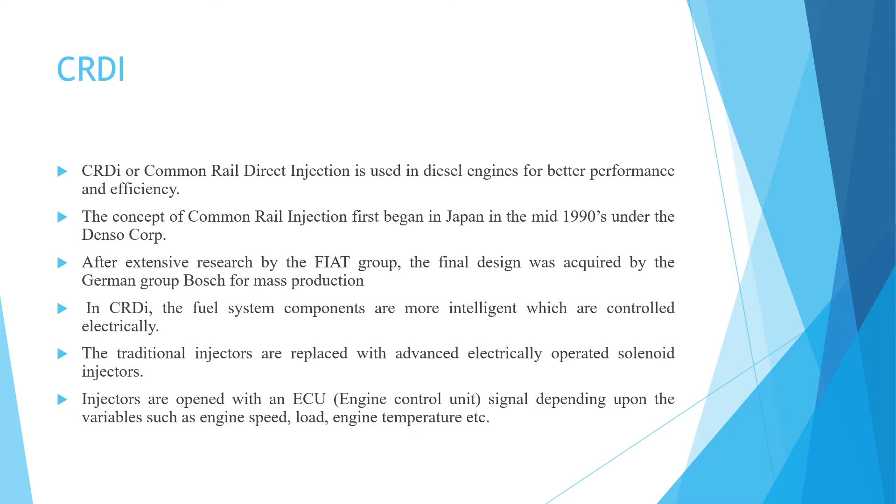In CRDI, there is a common line called the common rail, and each injector is directly connected with this line. Through this line, fuel is sent into the cylinder.

In conventional diesel engines, the pressure needs to be readjusted for each injection process. While in CRDI, the pressure is always constant, and this pressure remains constant along the fuel line.

The ECU adjusts the injection timing of the injectors depending on engine load and engine speed. The amount of fuel to be delivered to the combustion chamber is set by the ECU with information provided by sensors in the engine.

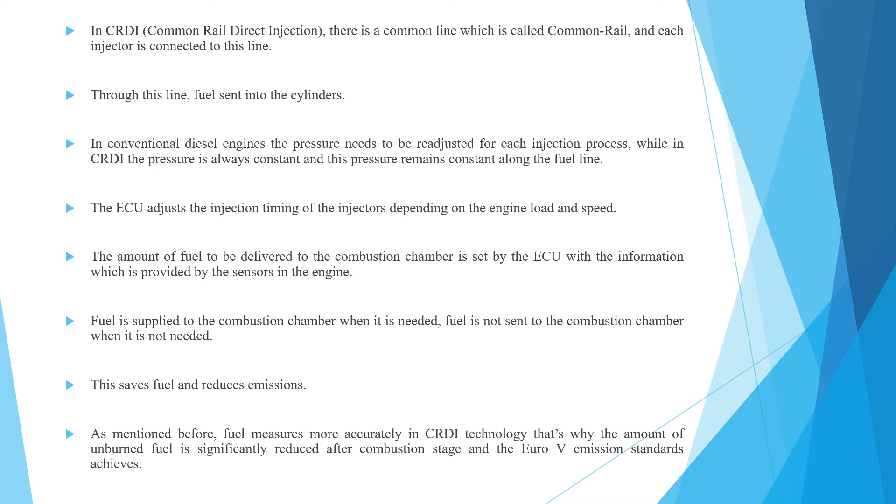History: The common rail system prototype was developed by Robert Huber and Dr. Marco Ganser at the Swiss Federal Institute of Technology in the late 1960s.

But the first successful use of this technology was accomplished by Japan in the 1990s. For the first time, this technology was used on heavy vehicles and later adapted to automobiles and passed to mass production.

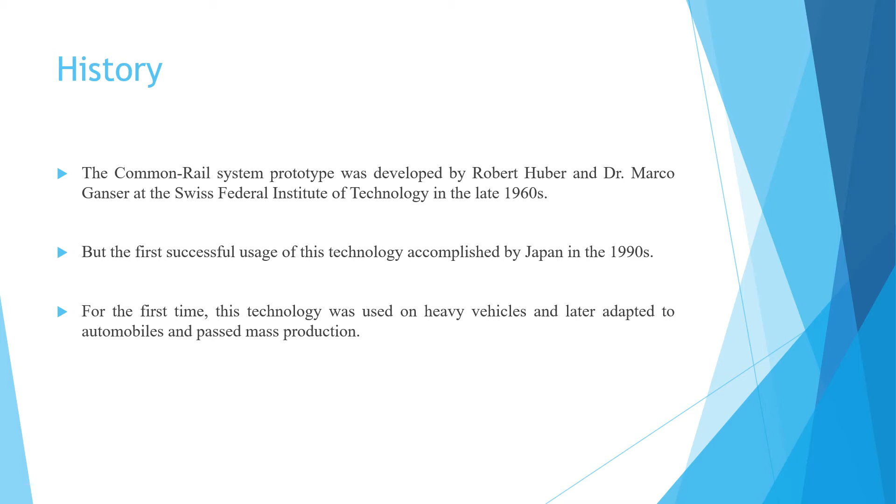The high pressure pump is used to supply fuel to the accumulator from the fuel tank. In case pressure in the accumulator increases beyond the limit, the high pressure relief valve, which is connected to the accumulator, helps to reduce the pressure.

Now this fuel from the accumulator is supplied to the engine cylinder using the fuel line with the help of solenoid injectors. Another spring-loaded high pressure relief valve is used to maintain constant pressure in the system for smooth operation. It also returns the extra fuel from the accumulator to the fuel tank.

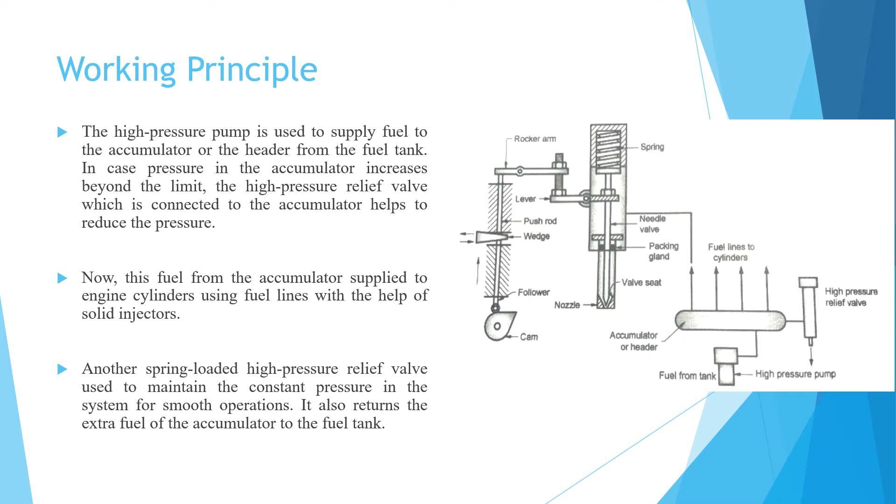In the diagram, you can see the needle valve. It is used to control opening and closing of the nozzle while it sprays fuel into the cylinder. The upward and downward motion of the nozzle is measured by the cam, which is connected to the spring with the help of the rocker arm and the lever.

During the dwell period of the cam, the spring, with the help of the needle valve, prevents the injection of fuel into the cylinder. The packing gland ensures the level of fuel above the valve seat for better injection of fuel into the cylinder.

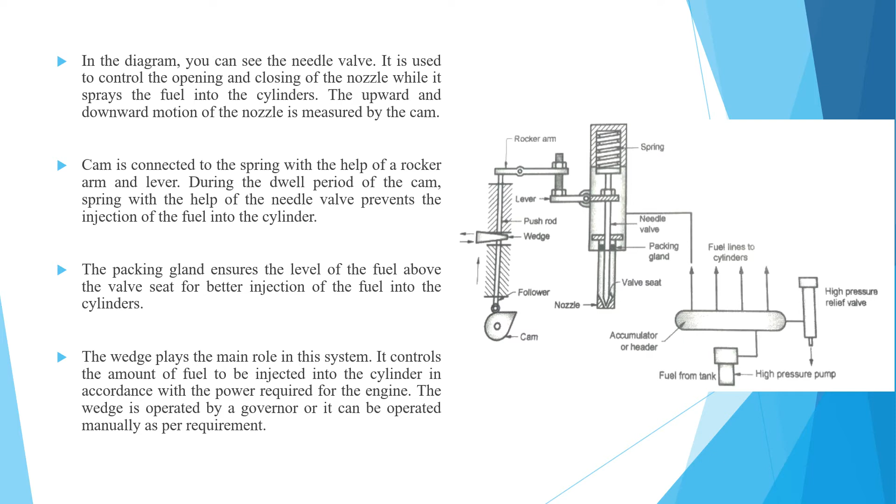The wedge plays the main role in this system. It controls the amount of fuel to be injected into the cylinder in accordance with the power required for the engine. The wedge is operated by the governor, or it can be operated manually as per the requirement.

Now coming to the features of CRDI technology. The emission problem has always been a problem.

For ships, trains, heavy duty vehicles, generators and other vehicles with diesel engines. Another important problem was that customers were constantly looking for economical engines with lower fuel consumption. The emission problem was solved by the diesel particle filter and the catalytic converter. But this time, these systems were causing a problem with the large space requirement. To cope with this problem, a few changes had to be made in the diesel engine.

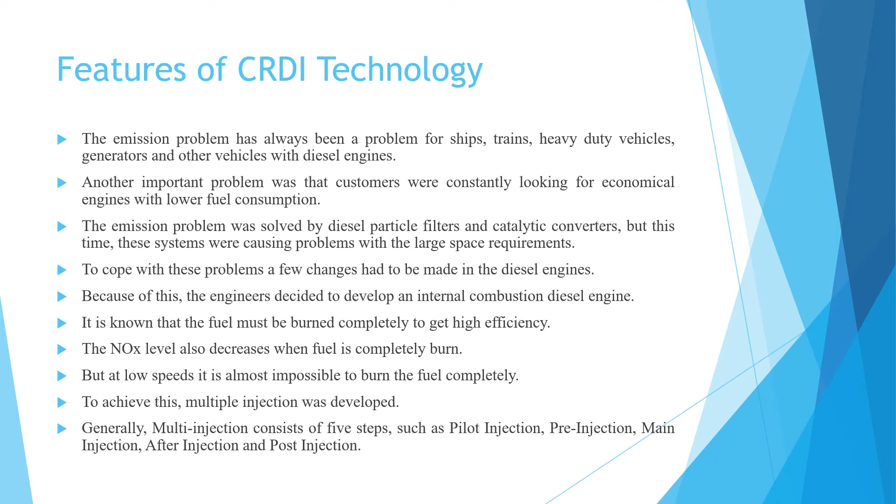Because of this, the engineers decided to develop an internal combustion diesel engine. It is known that the fuel must be burned completely to get high efficiency. The NOx level also decreases when the fuel is completely burned, but at low speed it is almost impossible to burn the fuel completely. To achieve this, multiple injection was developed. Generally, the multiple injection consists of 5 steps, such as pilot injection, pre-injection, main injection, after injection and post-injection.

In the first stage, the pilot injection occurs immediately before the ignition. It allows the fuel and air to mix properly. In the second stage, pre-injection occurs and it reduces the ignition delay before the main injection. NOx level, noise and vibration are reduced at this stage.

The heat generated by the pre-injection is much higher than the heat required for the fuel itself to ignite. In this case, when the main injection takes place, as the third stage, the yield from the fuel becomes higher. In the fourth stage, after the injection takes place, the unburned fuel is burned. And finally, post-injection helps generate heat which is required by the catalytic converter. In this way, the catalytic converter works more efficiently.

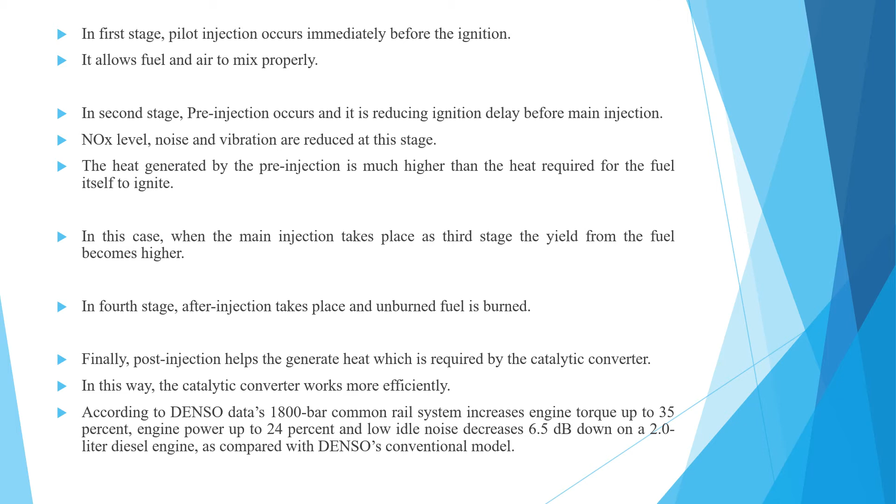Compared to gasoline, diesel fuel is less volatile and denser than gasoline. So it is difficult to atomize the diesel fuel. In order to get better atomization, diesel fuel must be injected at a high pressure. For this reason, CRDI technology has a high pressure fuel pump. This pressure is maintained even if the vehicle is at idle. That is why the fuel is injected quickly when the injectors are open. CRDI improves atomization as well as shortens injection time. The problem of diesel knock is also reduced.

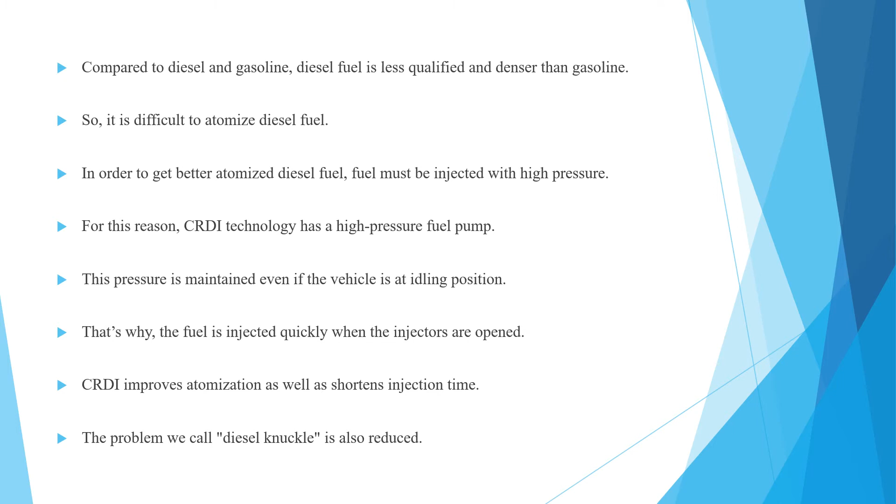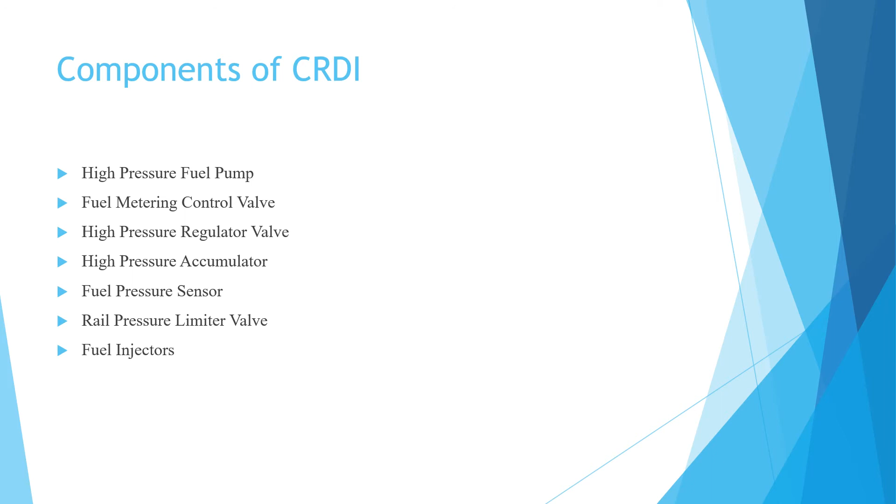Now coming to the components of the CRDI. There are 7 components of this CRDI. First, the high pressure fuel pump. Second is the fuel metering control valve. Then the high pressure regulator valve, the high pressure accumulator, fuel pressure sensor, rail pressure limiter valve, and the fuel injectors. So let's start with the high pressure fuel pump.

The high pressure fuel pump is located between the low pressure and high pressure pipe. The basic function is to transmit the fuel to the system at the required pressure. The high pressure fuel pump is supplied by an electric pump. This pump produces the fuel pressure required for the high pressure injector to provide ideal mixing of the fuel and air directly into the combustion chamber. Some systems also have a transfer pump with an electric pump.

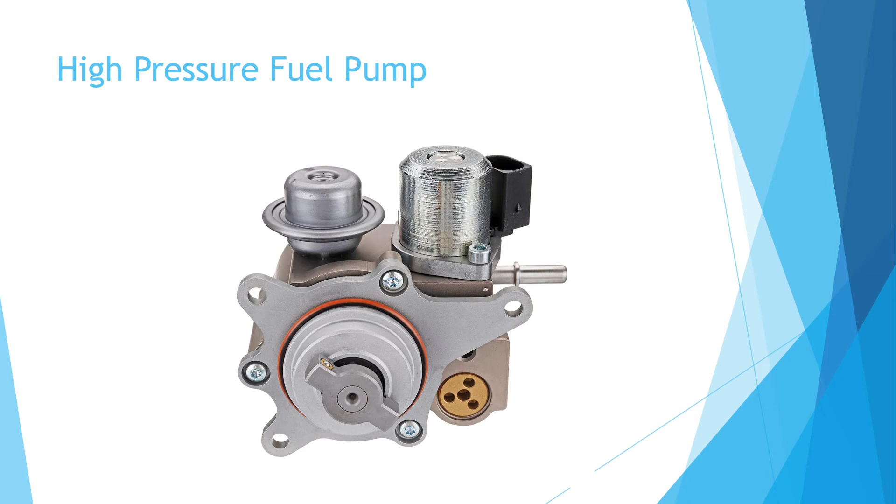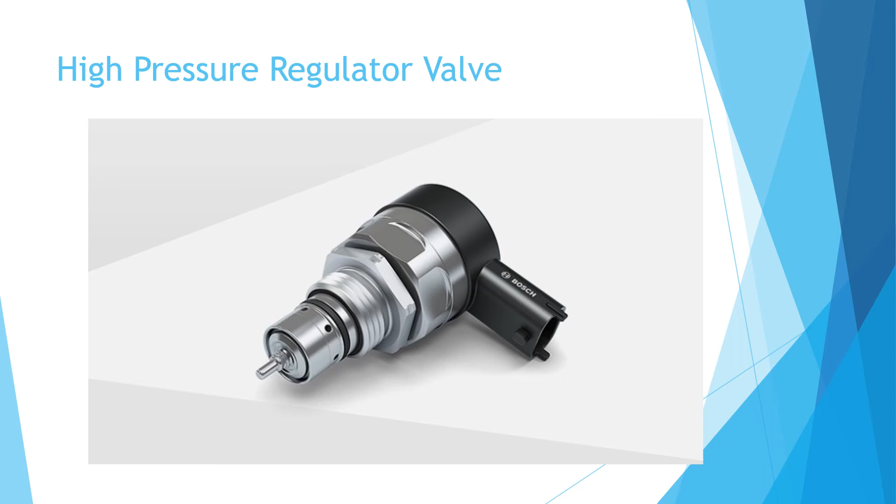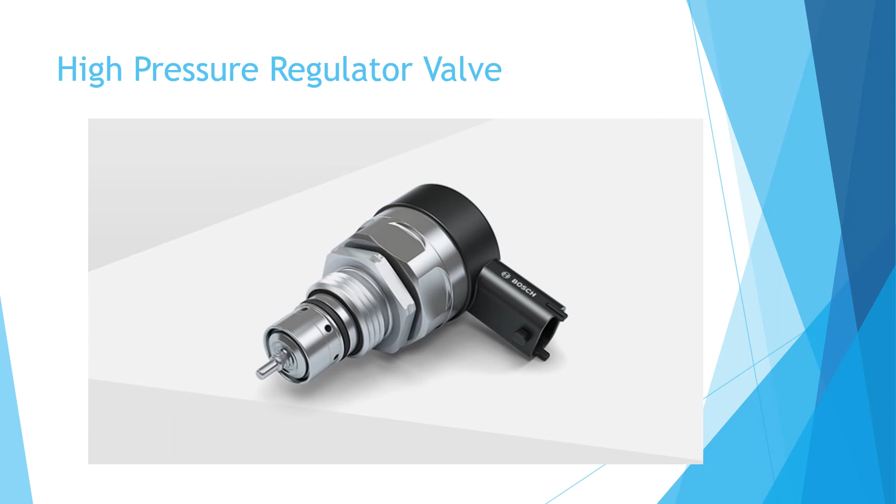Next is the high pressure regulator valve. It controls the high pressure fuel which is delivered to the common rail. It sends the excess fuel into the fuel tank and it cools down the fuel before sending it to the tank. So after the high pressure fuel pump, the pressure regulator valve controls the high pressure fuel which is delivered to the common rail and sends the excess fuel to the fuel tank after cooling it down. So this is the high pressure regulator valve.

Next is the high pressure accumulator. The fuel is sent to the common rail at high pressure. The fuel is stored here and distributed by the injectors. In addition, the common rail or this high pressure accumulator eliminates vibration caused by the high pressure pump. So this high pressure accumulator is known as the common rail.

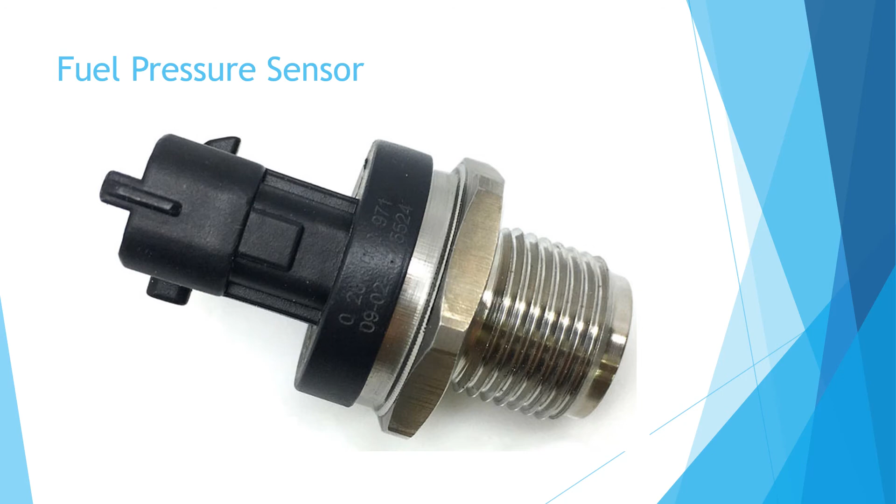Next is the fuel pressure sensor. The fuel pressure sensor is located on the fuel rail. It measures the fuel pressure on the common rail and communicates with the engine computer. So this fuel pressure sensor is connected with the common rail and it helps to measure the fuel pressure, meaning the pressure of the fuel which is stored inside the common rail.

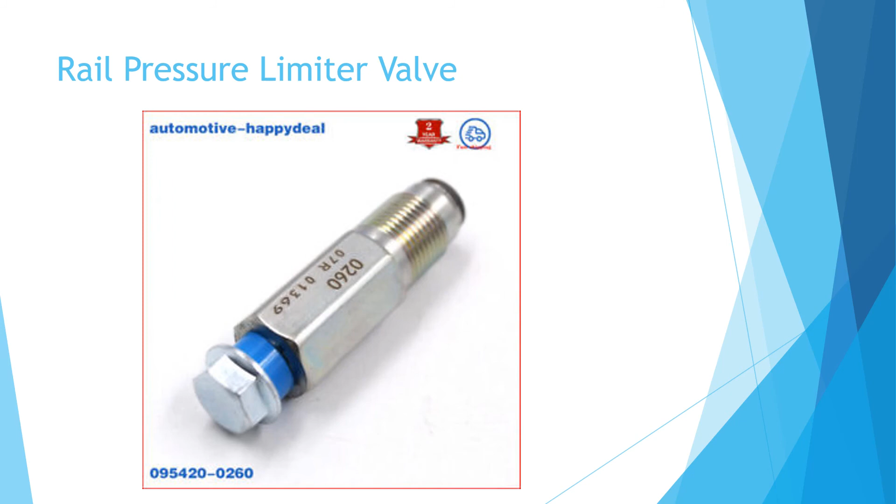Next is the rail pressure limiter valve. It is located on the fuel rail. If excessive pressure is generated, that pressure is relieved by the rail pressure limiter valve and the excessive fuel is sent back to the fuel tank. So if excessive pressure is generated, this valve helps to release the pressure and maintain the fuel pressure inside the common rail by passing the fuel back to the fuel tank.

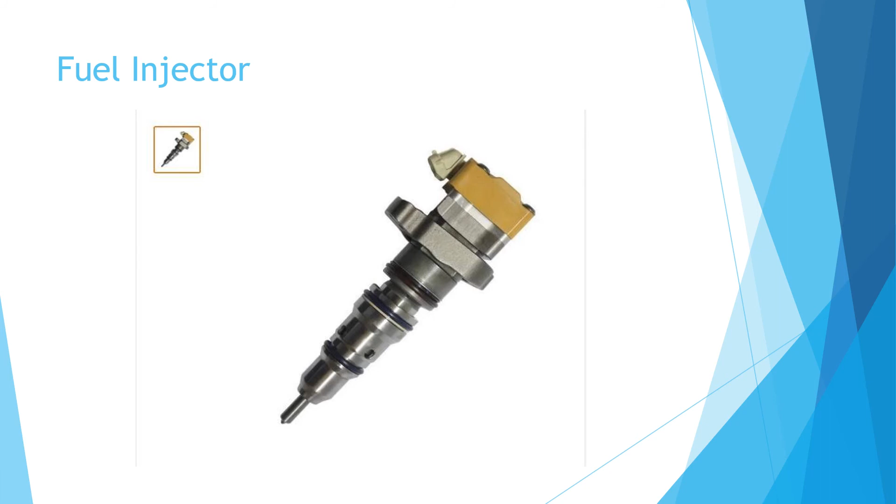Next is the fuel injector. The fuel injectors are controlled by solenoid and piezo actuators. Excess fuel is returned to the fuel tank by the injector's piston. Piezo injectors are 4 times faster than solenoid injectors due to their fast response time. So this is the part of the CRDI engine.

Now we'll discuss the advantages and the disadvantages of this CRDI, or common rail direct injection system. The advantages are higher fuel injection pressure and better atomization. Injection pressure is created independently of engine speed. Multiple injections for each cylinder are possible. 25% or more engine power and torque is gained. Lower vibration and noise level. Lower fuel consumption and lower emissions level. So these are the advantages of using the CRDI technology.

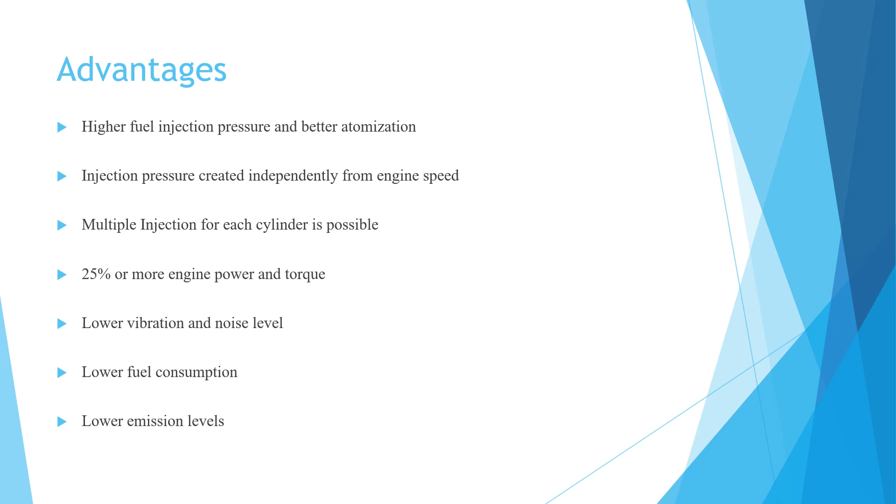Next are the disadvantages. High cost engine. It requires high maintenance, and the cost is increased as the spare parts are so much expensive. These are the 3 limitations or disadvantages of this CRDI technology.

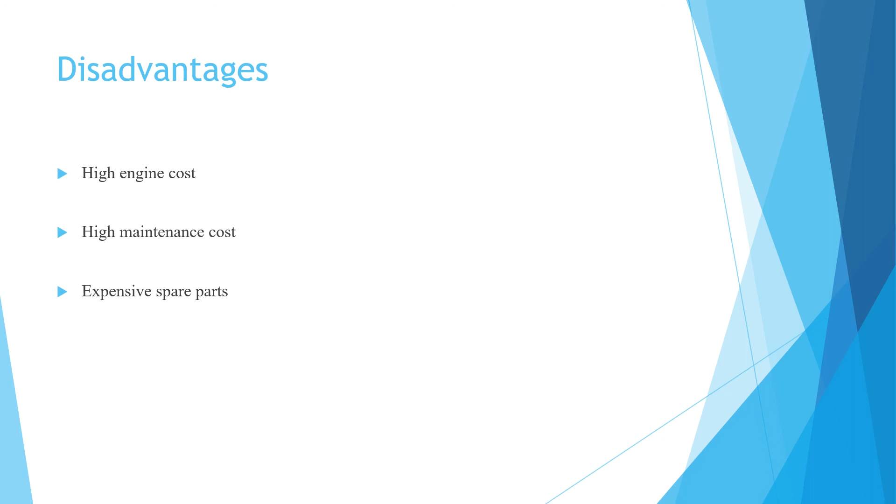Now we come to the differences between DI and IDI, where DI means direct injection and IDI means indirect injection. In direct injection, the injection pressure is higher, 21 kg per centimeter square, as compared to IDI, because fuel atomization depends solely upon the pressure of the injection. This type of engine is very easy to start in the cold also. The fuel injection nozzle has multiple holes, as high atomization and mixing is required because swirling of air is less in this case. Thermal efficiency is higher as compared to the indirect injection engine.

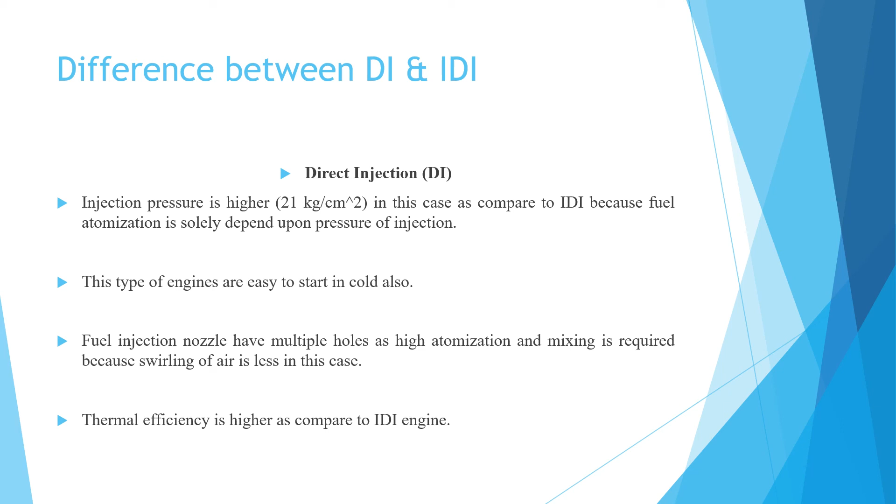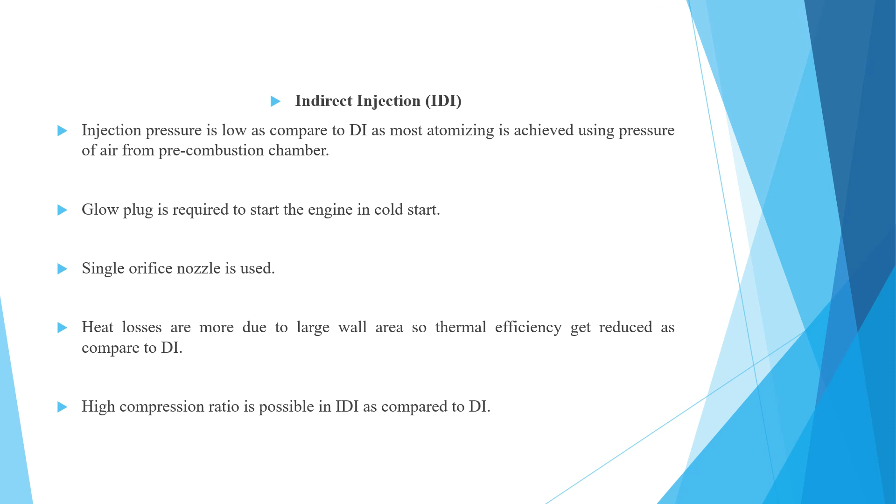Next is indirect injection, or IDI. The injection pressure is low as compared to direct injection, as most atomizing is achieved using the pressure of air from the pre-combustion chamber. A glow plug is required to start the engine in cold start. A single orifice nozzle is used here. Heat losses are more due to the large area, so thermal efficiency is reduced as compared to direct injection. A high compression ratio is possible in indirect injection as compared to direct injection.

Here are the acronyms of the CRDI. Various companies know the CRDI by different names, but the technology is the same. For Mercedes-Benz, it is known as CDI. In Hyundai, it is known as CRDI. For BMW and Volvo, it is known as D. For Fiat, it is JTD. For Tata, it is CR4. For Renault, it is DCI. For Chevrolet, it is VCDI.

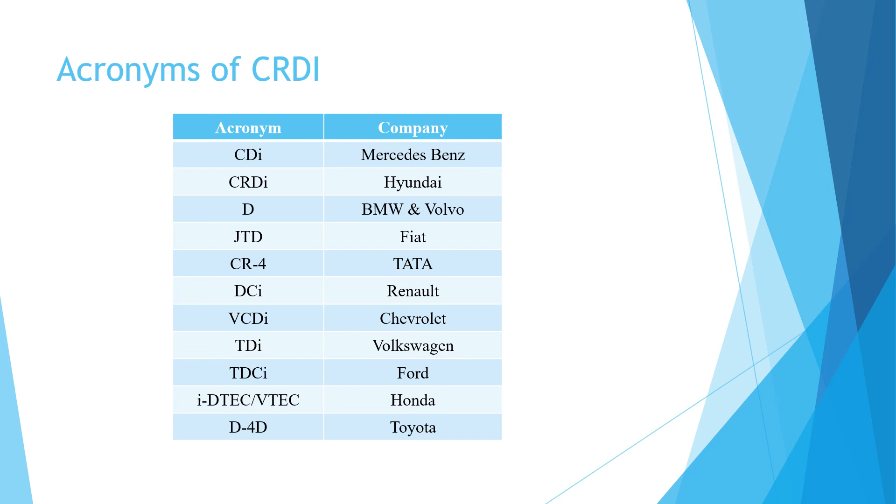For Volkswagen, it is TDI. For Ford, it is TDCI. For Honda, it is i-DTEC or VTEC. And for Toyota, it is D4D.

So students, from today's class, we learned about the CRDI technology, its working principles, its components, its acronyms, its advantages and its disadvantages. In this electronic fuel injection system topic covered today, we learned about the electronic fuel injection system and its various types. We also learned about conventional petrol and diesel engine fuel supply, differences between carburetor and injectors, and the various types of fuel injection systems. We described the MPFI and the CRDI technology elaborately.